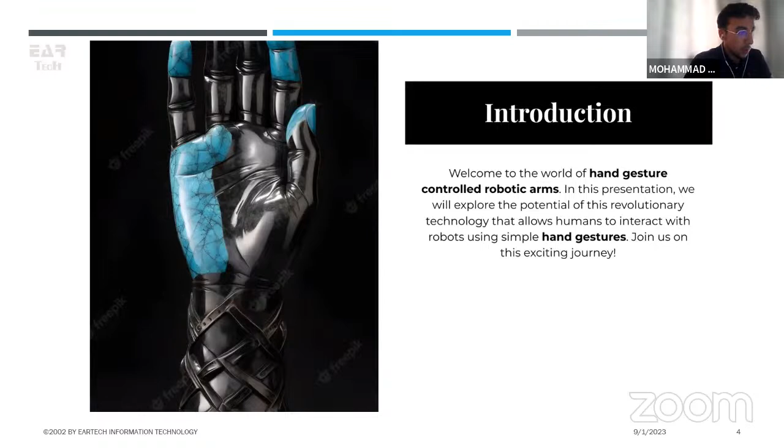So, revolutionizing robotics, exploring the potential of a hand gestured controlled robotic arm. We all know about the robotic arms. We're going to start up with an introduction. Welcome to this world of hand gesture controlled robotic arms. In this presentation, we will explore the potential of this revolutionary technology that allows humans to interact with robots using simple hand gestures. Join us on this exciting journey.

So the basic knowledge that we have to know about robotic arms, as we can see from the picture, they have multiple joints that mimic the joints present in the human arm, which are the shoulder, elbow, and wrist. And usually in the robotic arms, they take the form of motors that move certain links in order to accomplish a task. So the robotic arms are mechanical devices designed to imitate human arm movement. They are widely used in industries like manufacturing, healthcare, and space exploration. We will talk about these in more detail in the upcoming slides.

With recent advancements, hand gesture control has emerged as a promising way to enhance the usability and flexibility of a robotic arm. What's better than to program a robotic arm to make a task happen is basically to have it follow a certain movement that is very organic, which is the movement of the hand or the human arm. And that's what we want to do.

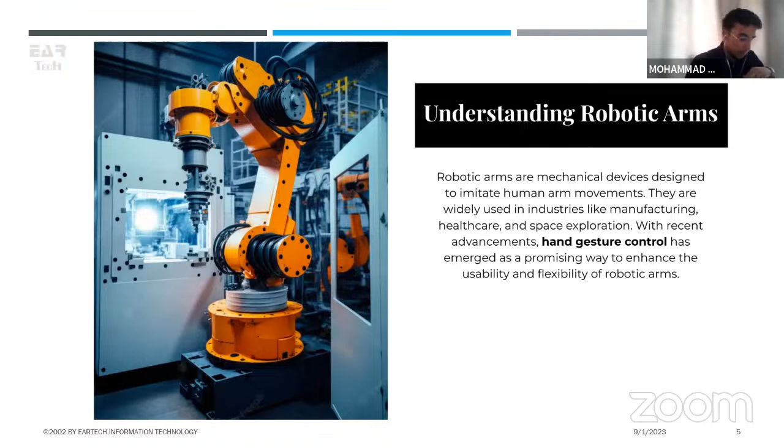Now, the power of a hand gesture, since we want to mimic it, we have to understand the power behind it. So hand gestures are a natural and intuitive form of communication. By leveraging computer vision and machine learning, robotic arms can interpret hand gestures to perform various tasks. This technology opens up a whole new realm of possibilities for human-robot interaction.

So what we mean by this is, since we have computer vision, which we can interpret using either cameras or similar sensors, and then couple it with machine learning that would allow us to identify the hand in the picture and then follow its movement and then feed that input data to the robotic arm, that would allow the robotic arm to move accordingly.

In my personal project, I did not use any cameras to have this data, but I used something else. I would say that is less complicated in my opinion, and just to simplify it, I tried to build this sort of low budget hand gesture controlled robotic arm.

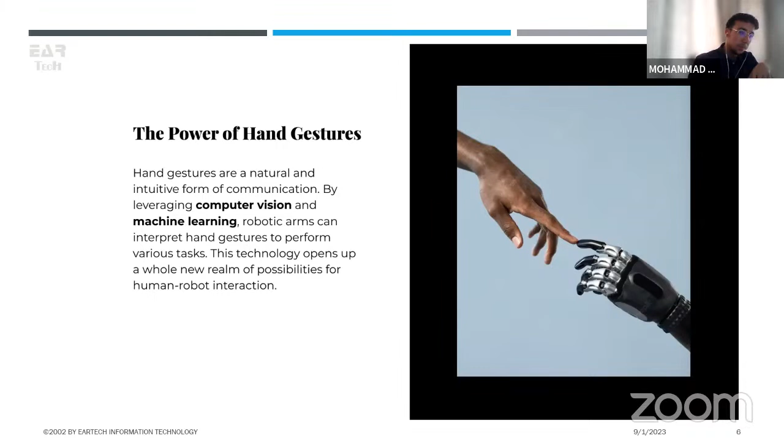So for the applications of this new technology in the healthcare field, hand gesture controlled robotic arms have immense potential in the healthcare industry. As we all know, surgeons can perform delicate operations with precision, reducing the risk of human error. Additionally, these arms can assist patients with limited mobility in their daily activities, providing them with more independence.

As we know, in the medical field precision is very crucial, and human error is sometimes the main differentiator between life and death. So if we can minimize this human error as much as we can, we should take the decisions to make it happen.

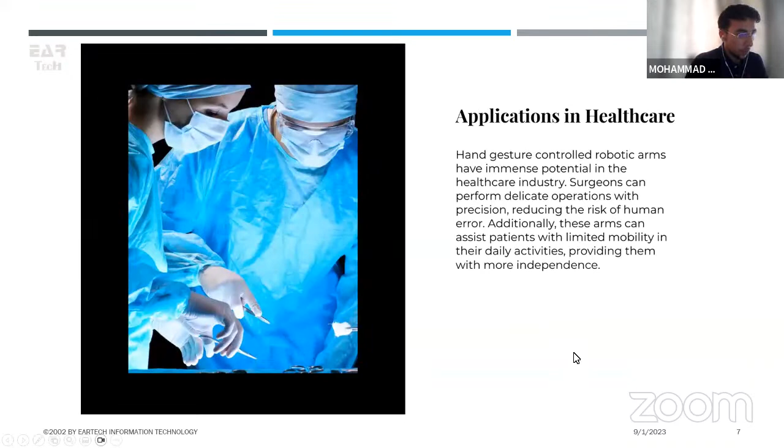So for the manufacturing field, in manufacturing, hand gesture controlled robotic arms can streamline the production processes, enhance worker safety, and increase efficiency. Workers can manipulate the robotic arm from a safe distance, reducing the risk of accidents and repetitive strain injuries. These technologies can also enable quick reprogramming for different tasks.

This part we have talked about immensely with Tulip Technologies, as they showed us different robotic arms and their use in this industry.

We have talked about workers being exposed to certain danger when it comes to repetitive tasks. They might have repetitive strain injuries, and also if they have to carry loads, that could injure them. So if we can substitute the human with the machine in this case, we would provide a more safe environment for the workers to be in.

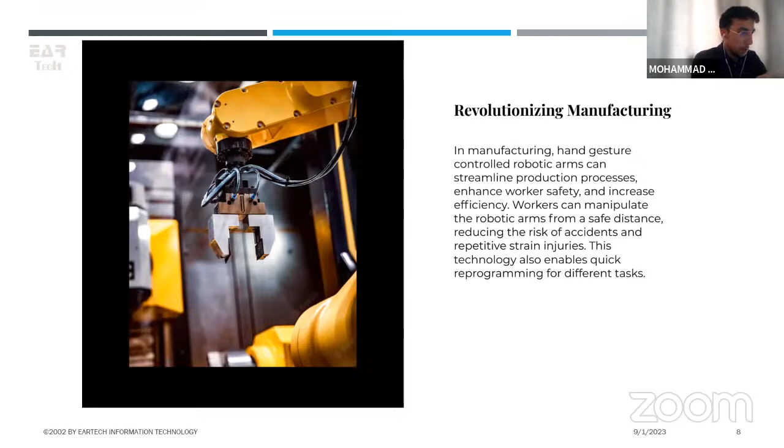And for the last field we're going to talk about: exploring space with gestures. As we all know, we are in a race to space. Everyone wants to go outside the Earth, so we are all working to discover outer space, from going to Mars, dropping the rover on Mars, to exploring the moon further.

This space exploration often involves remote operations, where astronauts cannot directly manipulate objects. Hand gesture controlled robotic arms can bridge this gap by allowing astronauts to control robotic arms on the spacecraft or rovers using intuitive hand gestures. This technology opens up new possibilities for space missions.

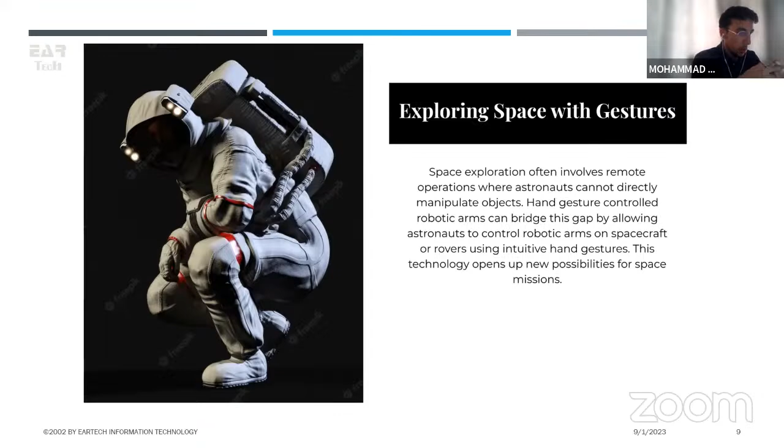Like any technology, these hand gesture controlled robotic arms have challenges and limitations. While they offer exciting possibilities, there are challenges to overcome. Ambient lighting conditions, for example, or occlusion and variation in hand gestures can affect accuracy. Additionally, training the system to recognize a wide range of gestures requires extensive data collection and robust algorithms.

So we need huge computational power. This was one of the main concerns, because working with the algorithms and machine learning requires a lot of computational force. So we're going to see what Google did about this later.

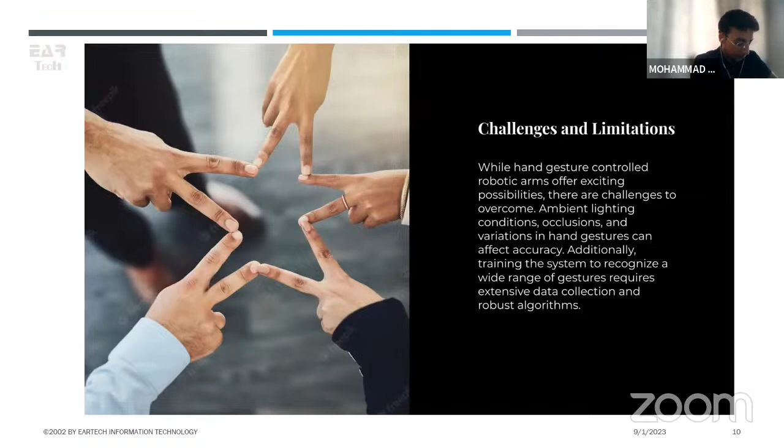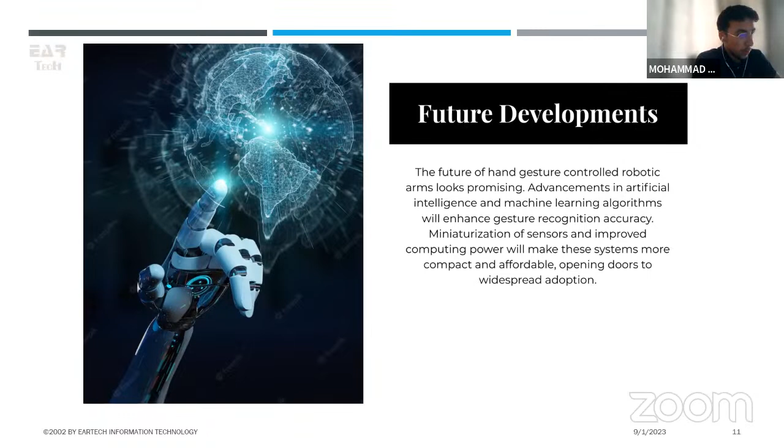Now for the future developments, the future of hand gesture controlled robotic arms looks promising. Advancements in artificial intelligence and machine learning algorithms will enhance gesture recognition accuracy. Miniaturization of the sensors and improved computational power will make these systems more compact and affordable, opening doors to widespread adoption.

As we can see, as of 5 days ago, Google announced that their new quantum computer has finally achieved this: it can complete 47 years of computing tasks in 6 seconds, which is crazy. It is 241 million times faster than Google's 2019 version.

This has been posted on LinkedIn, so we can see that the potential here is limitless, especially when it comes to data analysis. We can collect all the data and all the processes, and solve everything just in an instant, which is going to make hand gesture recognition and everything much faster, more on point, and accurate.

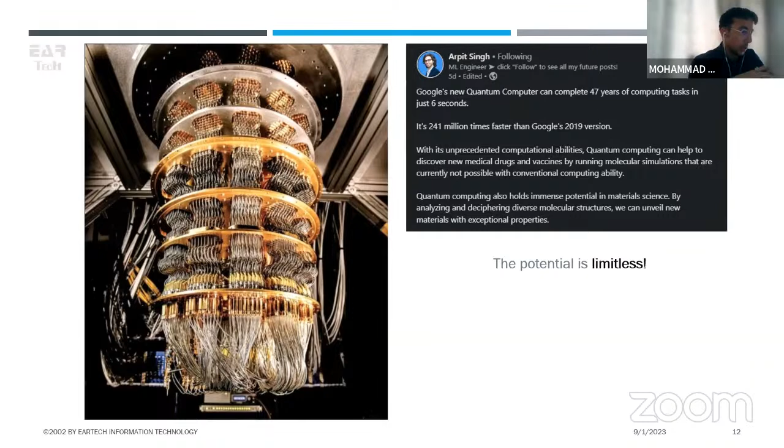Now for the fun part, my project. Remember when we mentioned that quote by Mark Kennedy, speaking of laziness? I thought about making a hand gesture controlled robotic arm that is compatible for desktop, which means it has to be small, compact, and with a lot of safety regards.

It's going to be close to the user and close to his belongings. Since laptops and everything are quite expensive, we don't want to damage any of that. So all of those things are taken into consideration in the making of this project.

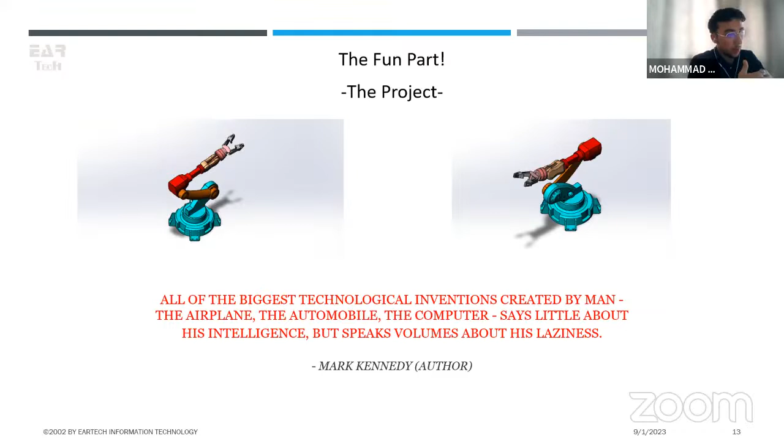This is the model that we are going to be toying with later. For now, I'm going to show you what the end result would look like, and it will be 3D printed and then assembled. So this is what it's going to look like.

We basically have a turntable here that has a main servo motor. We have a lot of other servo motors on the sides. This one has 3 main links, and this is the gripper. So this is the arm, turntable, and the gripper.

The hand gesture controlled robotic arm project aims to create a desktop compatible robotic arm that can be controlled using hand gestures. The robotic arm will be 3D printed, then assembled, with its movement driven by servo motors, which are the dark gray boxes with wires coming out of them.

It's going to be controlled by an Arduino Uno, receiving information through a Bluetooth receiver. The control signals will be captured from a hand exoskeleton, which resembles a glove that usually envelops your hand. It's going to have an Arduino Nano, an accelerometer, and a flex meter for the finger for the gripper, and of course a Bluetooth emitter, so it can communicate the information.

So instead of having computer vision, instead of having a camera where I'd have to process the information and identify the hand and its movements, I would instead capture the movement using an accelerometer.

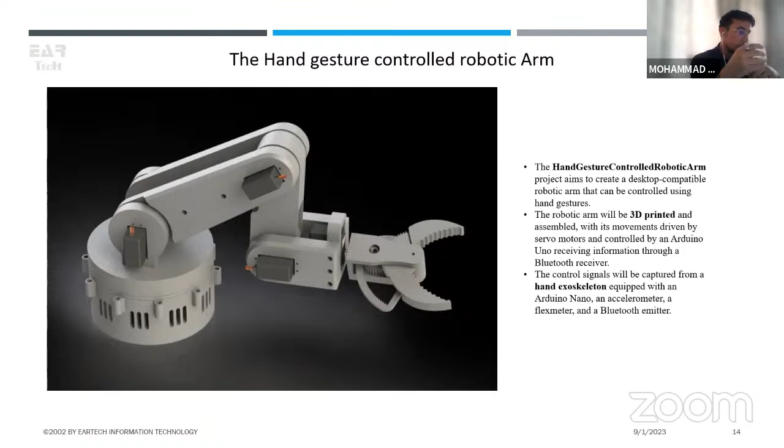So now for the parts, this is the arm, and in blue we have all the components that are part of the sub-assembly. We can see also some bearings. These bearings, for example, are not modeled here as they are usually just bought, and they have standard sizes.

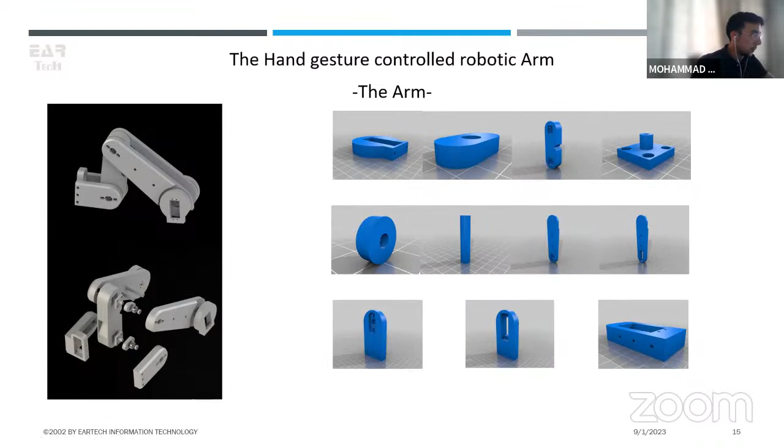So this is the arm. It has 3 links, as we spoke about. The second one is the gripper.

It looks quite complex in the geometry, but the working principle is quite easy. As we can see here, we have this gear right here. It turns this outside part to close it, and then this inside part. So as the gear turns, it's going to hit this gripper from the outside and this gripper from the inside, causing it to go in reverse directions. So it's either going to close or open. All the other pieces are used just to mount and clamp these together.

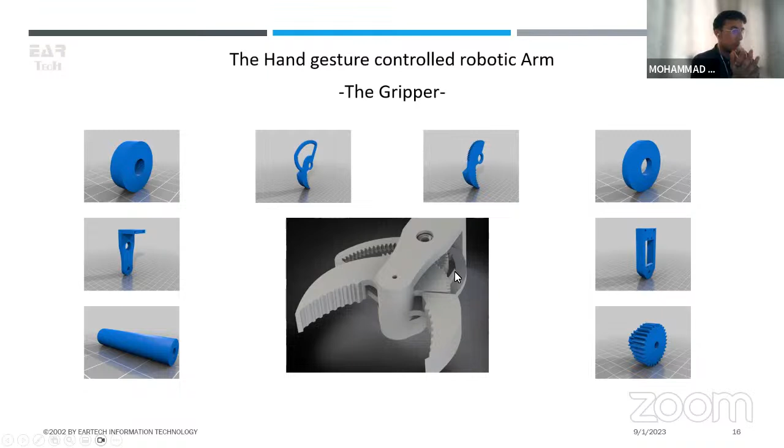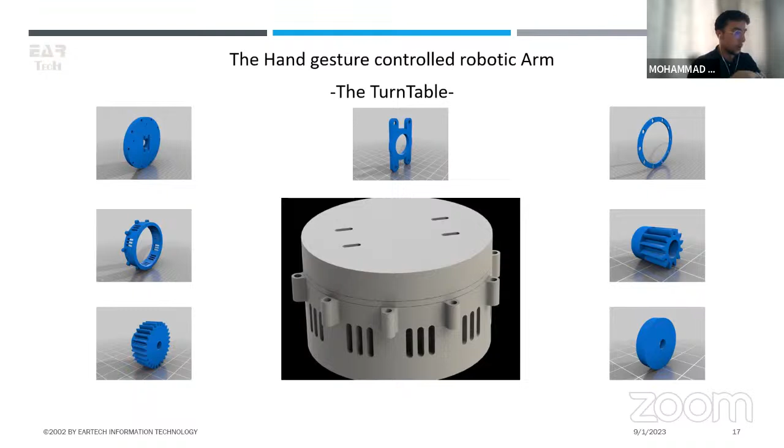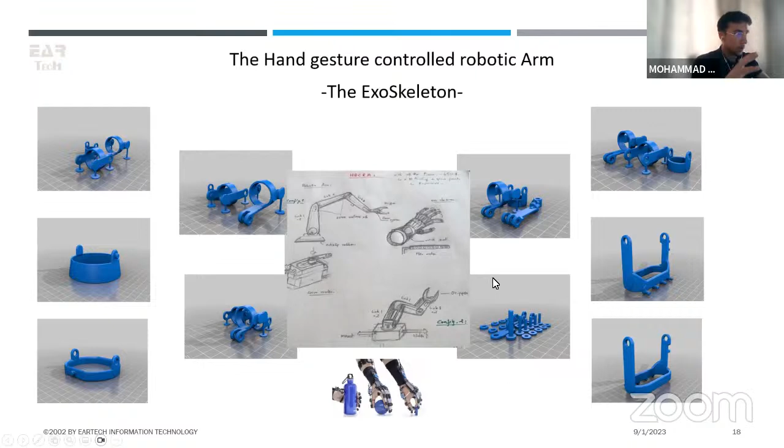And the flex meter is a string. I'm gonna show you how it looks later, the flex meters, and they would go with the finger. So whenever you flex your fingers, it's gonna send signals to the Arduino Nano chip, and then it's gonna send the signal to the Bluetooth emitter, which is gonna send the signal to the robot, telling it that the gripper should close. That's basically the working principle, as well as the accelerometer. The accelerometer can see if I'm moving my hand left, right, up, down, and it's gonna emit that information too. That's basically the main information flow.

I'm just gonna go over this really quick. So this right here is the coupling of the main stepper motor that is in the turntable. These are the 6 servo motors that are in the robotic arm. And together they are usually coupled like this with a battery here.

This string right here looks like a string with a lot of squares. This one is a flex meter. The first one is just to test it. Here we attach it to the breadboard, and also we attach the breadboard to a blue chip.

This blue chip helps us measure the acceleration, velocity, orientation, displacement, and many other motion-related parameters of a system or an object. It's also what's gonna send the information to the Nano, send it to the Bluetooth, and then send it to the robot.

And here, of course, we're gonna have a lot of flex meters, so we can know exactly the amount of force that we're gonna use and everything. So this is an assembly of multiple flex meters together. How are they supposed to be coupled?

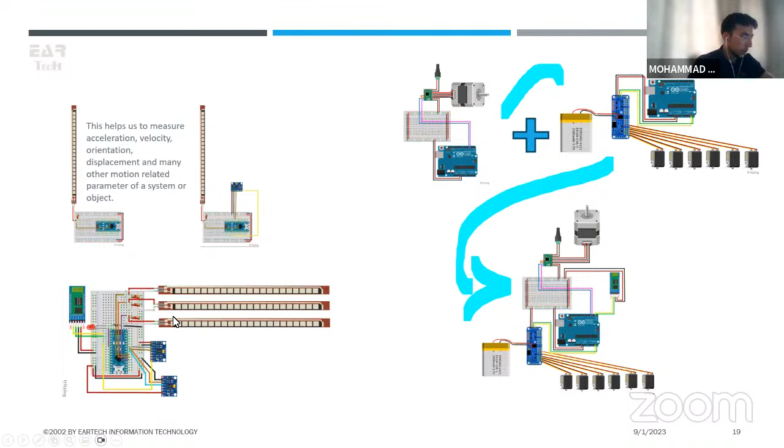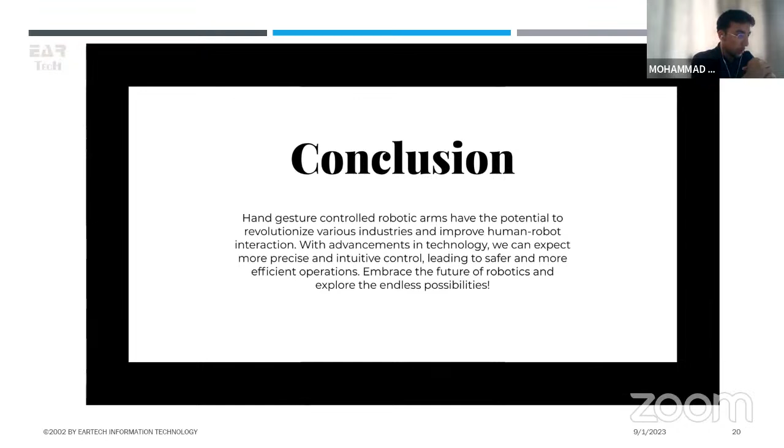Now for the conclusion, the hand gesture controlled robotic arm has amazing potential, and it has the potential to revolutionize various industries and improve human-robot interaction. With advancements in technology, we can expect more precise and intuitive control, leading to safer and more efficient operation. Embrace the future of robotics and explore the endless possibilities.

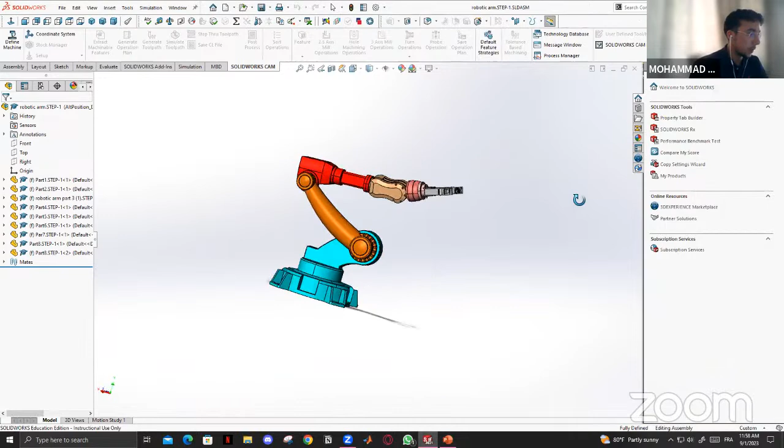Can you guys see the robotic arm? Yes, we can see. All right, so as you can see, this robotic arm is made of many pieces. These are the main parts.

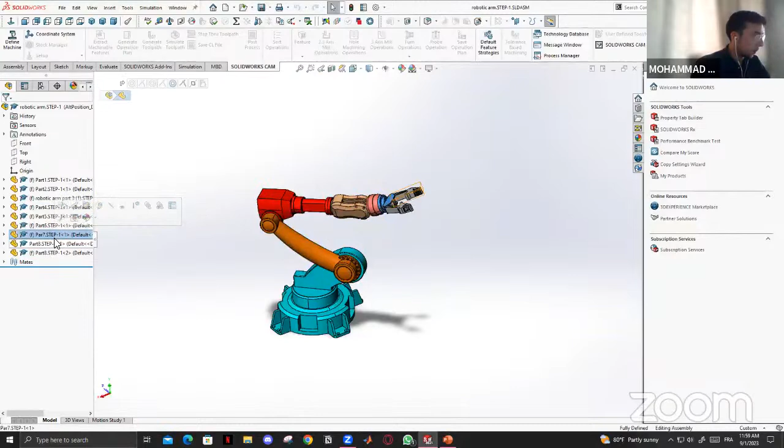So we have the base, right? And then we have this, which is the equivalent to the turntable. This is the turntable. This is the first link. This is the second link. And then we have the third link, which is connected from all of these together. And then we have the gripper, which are those two right here.

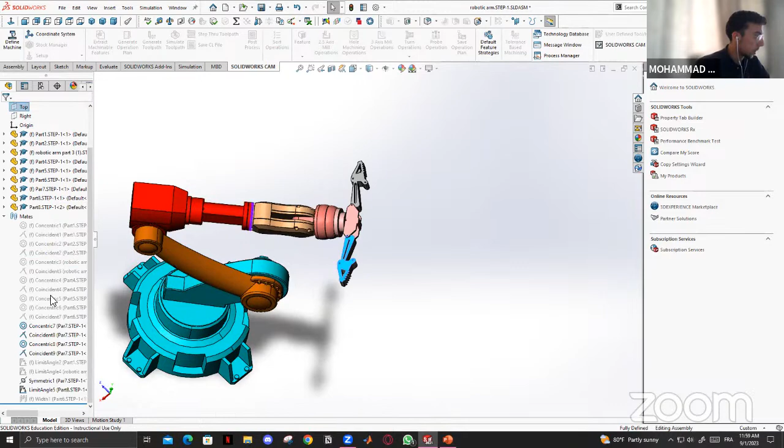So as we can see, if I make these float, I can move them to whatever I want, right? They can just move like this. And with the mates, I can also tell them exactly how to move and where to move.

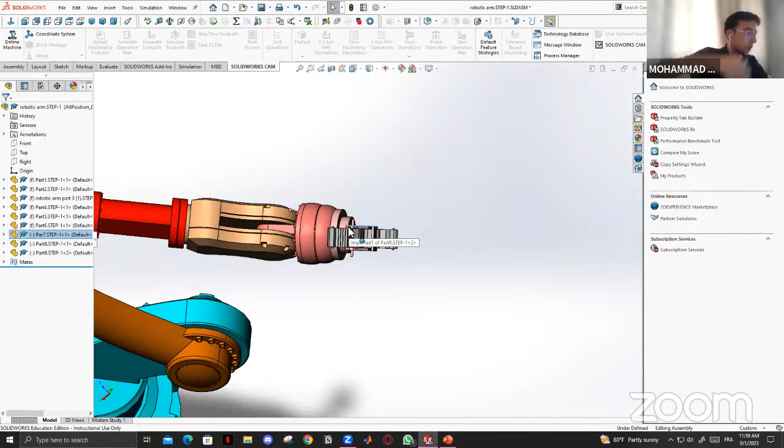Same for this, if I make it float for this configuration, now I can see that I can also turn it, right? So let's say if I want to grip something and I can't go like this, I would want to flip it a little bit and then grip it. So that's the reason behind this one turning as well.

Same thing with this one. I can make it go up and down, right? Giving me a full 360 motion, right?

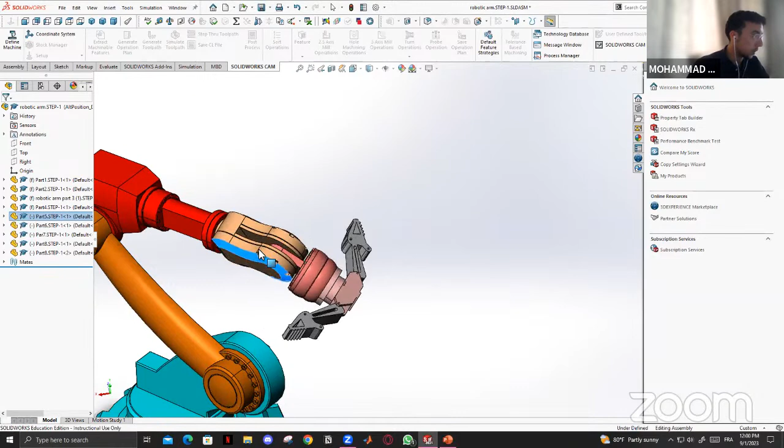And then we have this one as well. I can also make it float. And this one turns in the other direction, right? So I can turn and then go inwards. So I can turn like this, fix this again, and then I can turn again here for this motion.

Now let's see what happens if I move this one right here. Then the whole thing is gonna move, right?

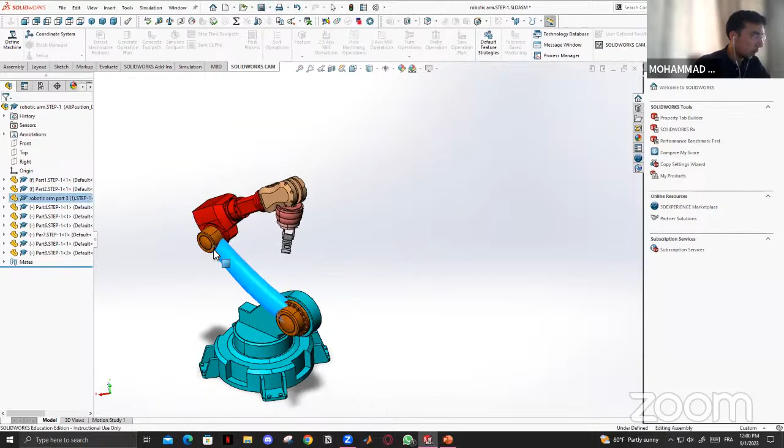And then same here again. If I move this one, if I move this link, which means I'm gonna have a motor right here turning the whole table, right? It's gonna turn all the links together. So if, let's say, I want to grab something here, I would go all the way down, grab it, and then go back.

And then at the end, also here, if I have, let's say, the servo motor on this table turning, it's going to cause everything to turn, right? And then that is basically it.